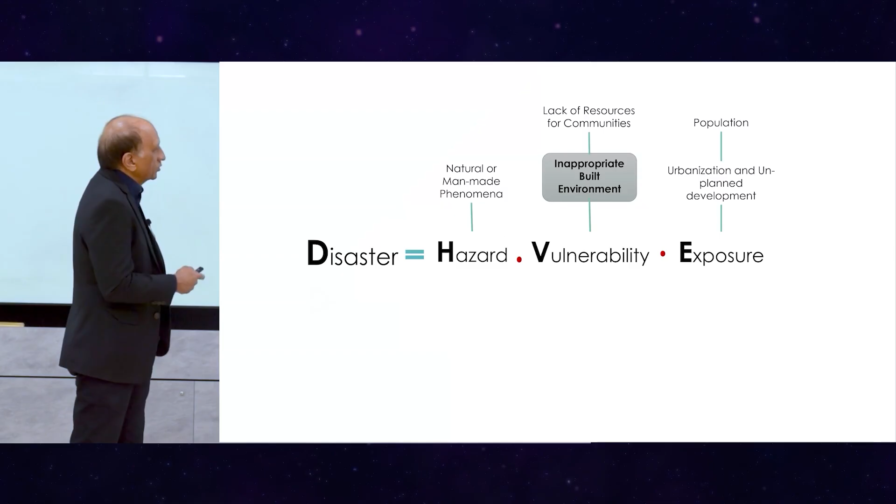So first of all, why is a safe structure essential? And that is because of disaster prevention. We all are familiar with all these disasters happening around us. Disaster has these components, as you know: hazard, vulnerability, and exposure. And as engineers, we may not have much control on the exposure, also may not on the hazard, but we have control over the built environment and its vulnerability.

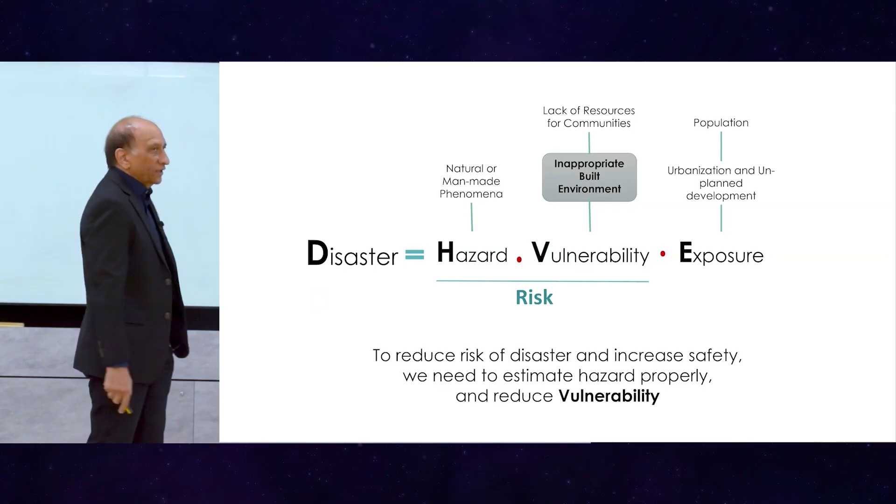And safety is part of that. So if you want to reduce the risk for the disaster, we need to reduce the vulnerability, because the hazard is not in our control that much. So vulnerability means that we need to make sure that our structure is safe, quote unquote.

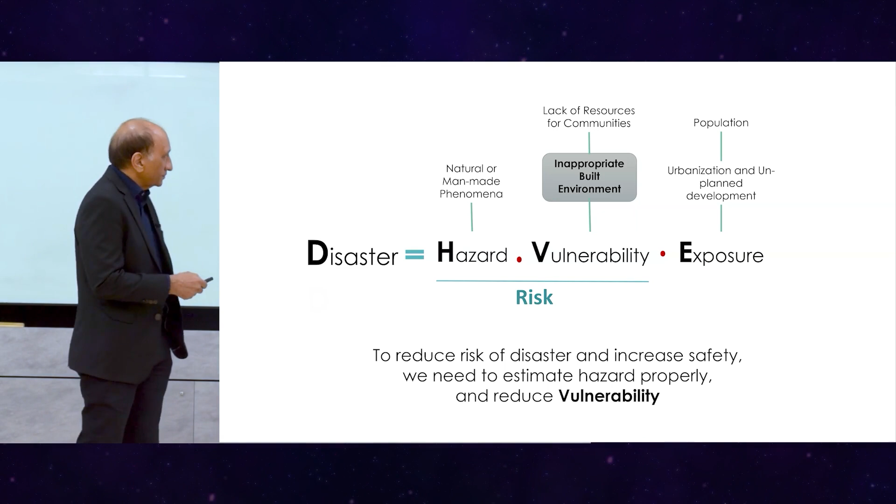Because we have so many hazards around us, from earth, from water, from air, from fire, and more man-made, it's hard to put them all together. In fact, multi-hazard assessment, vulnerability, and risk is a major area of research for many people.

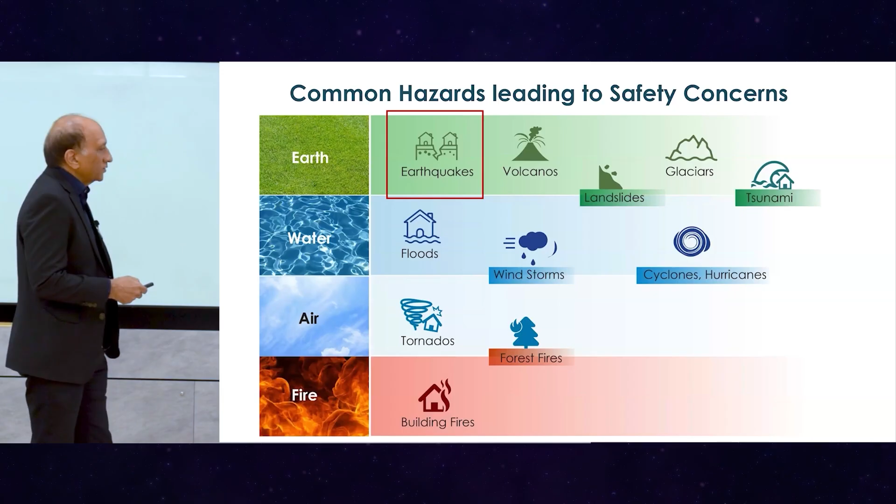But let's pick one of them for today, which is earthquake, and let's focus on how, as engineers, we handle earthquake or seismic design.

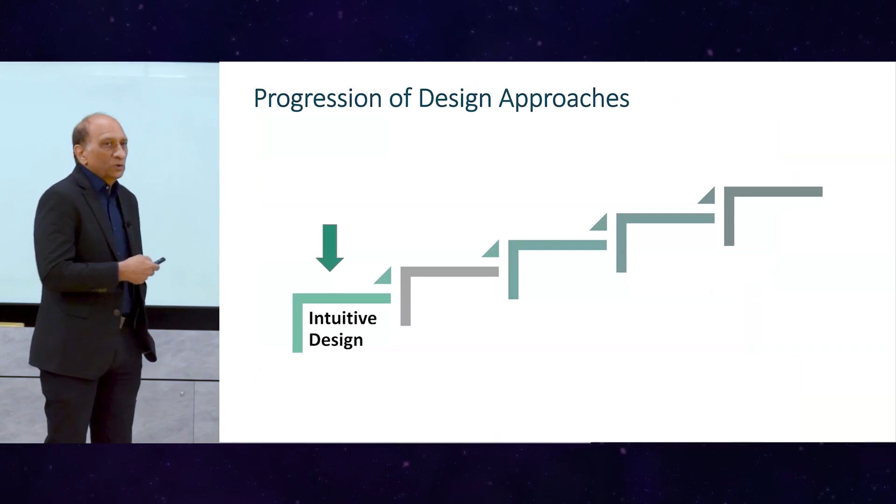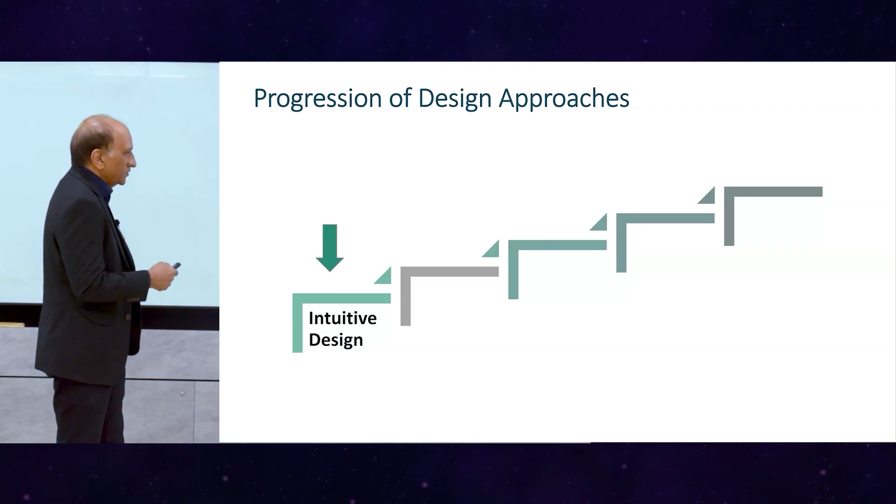In Hammurabi's time or before that, there weren't any building codes, no computers, no modeling, not even basic formulas, because those started in the 16th century. So people just used intuitive design or intuitive construction through practice and learning. Most things were just learned, passed from generation to generation, from one builder to his sons and his family. But then came code-based design, almost less than 200 years ago.

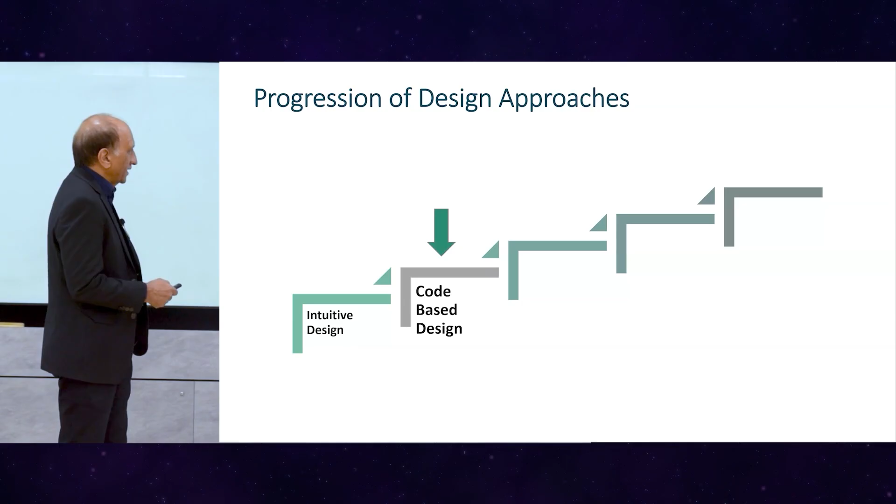And then we start to see formal definition of what engineers should do, procedures, and all of that. So let's look into that. How the building codes currently include safety is the first thing we should look at, and then see whether there's something we can learn from there.

The building industry these days relies heavily on building codes and standards, because they specify requirements, give acceptable solutions, and prescribe detailed procedures and rules for how to do things. Mostly they are based on research and experience, but not always rational, because some numbers are arbitrary or rounded, based on practical considerations.

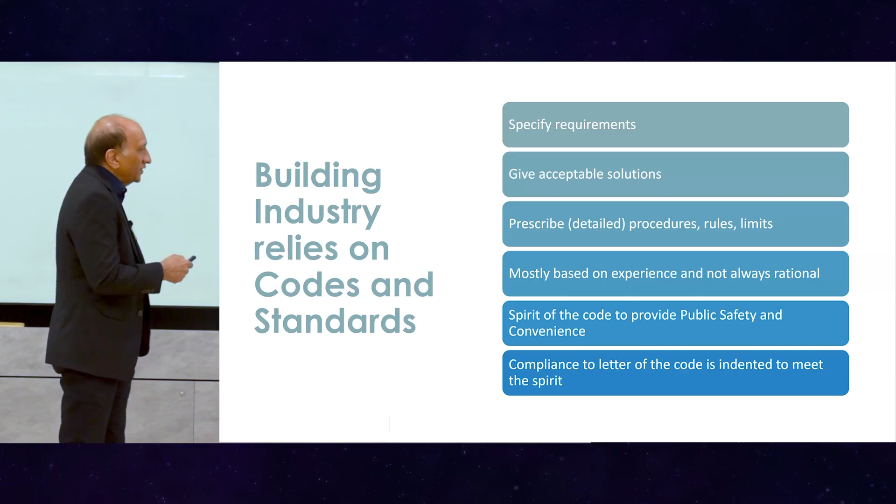The spirit of the code is great, because its spirit is to provide public safety and convenience. The idea is that if we follow the code to the letter, the spirit of the code will be met. But there is no way to cross-check that, no way to verify that this is actually happening. We have to trust that if we follow the code, we will get a good, safe structure.

Modern codes intend to ensure safety through estimated hazard or load levels. They will estimate how much live load there should be, estimate wind pressures, wind distribution, and earthquake levels—it used to be zones, but it's getting better now. They will also describe the structural systems and members, which structural system you can use for which height, and so on.

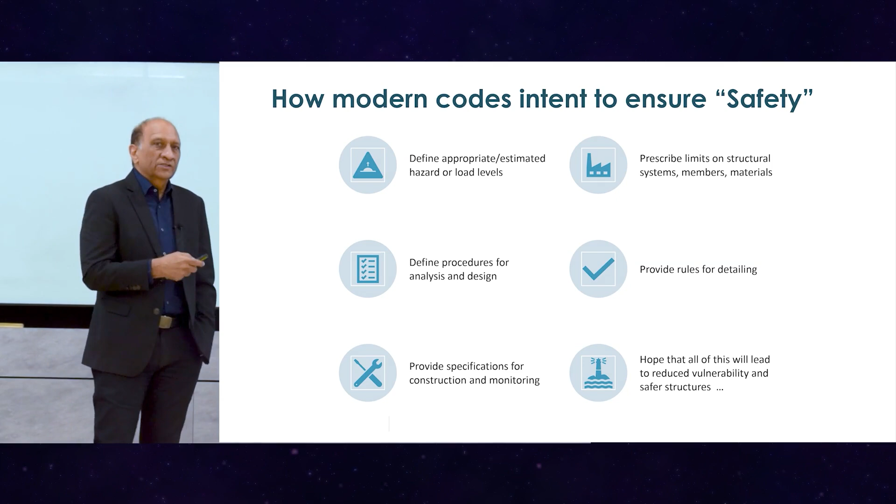They define procedures for analysis, which we will see today, and provide rules for detailing, which is very important. If you follow the rules and the detailing and everything, the hope is that it will lead to reduced vulnerability and structural safety. So that's the overall picture of the design codes and their philosophy.

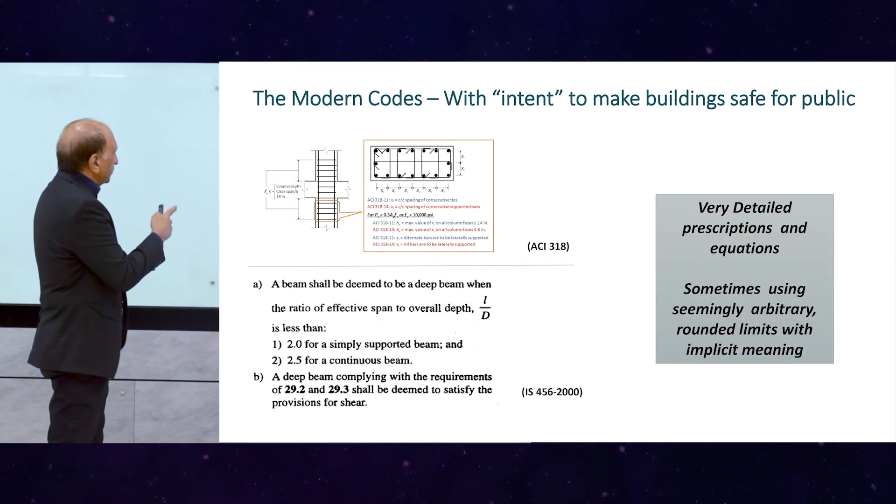Let's look at some of the requirements without going into details. As you can see, there are requirements with numbers—for this you do that, for that you do this, like the limit on the spacing of stirrups: 4 inches, 8 inches, rounded numbers, used in many places.

The intent, of course, is that we want to get a certain level of ductility and confinement. But the exact numbers aren't that critical, though most often they're taken to be literal. If somebody doesn't follow them, say providing a spacing of 5 inches instead of 4, or 150 instead of 140 or 120, then we say this is not conforming to the code, and we doubt the safety of the structure.

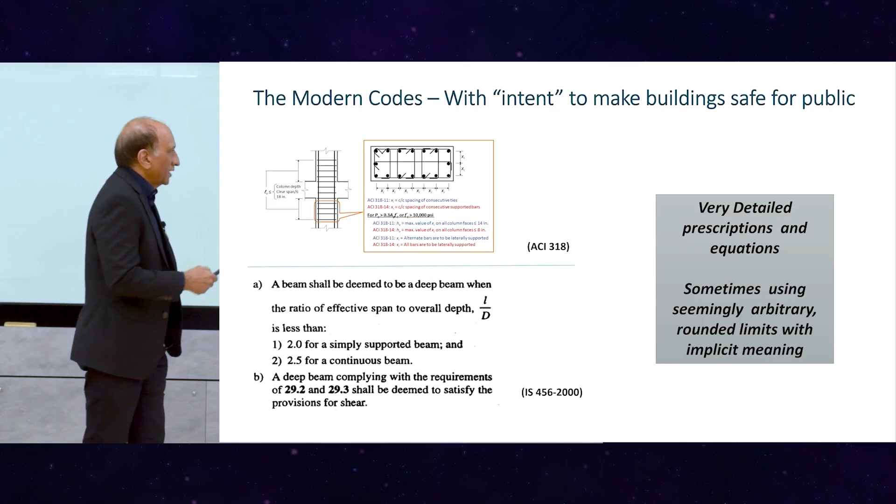That's what happens—most engineers, like myself at that time, were hiding or sheltering themselves from responsibility by saying 'I'm following the code.' A lot of the time we still do that, for legal battles or whatever. We say, as long as I'm concerned, I follow the code—you can check my calculation, and if that's okay, that's all I can do.

But that is not enough for the owners and the public. Owners will have many questions: Will the building collapse? Will it be damaged? Can I use the building after a given earthquake? How much will it cost to repair if it is damaged? How long will it take? Can I make a building that will not be damaged and will not collapse?

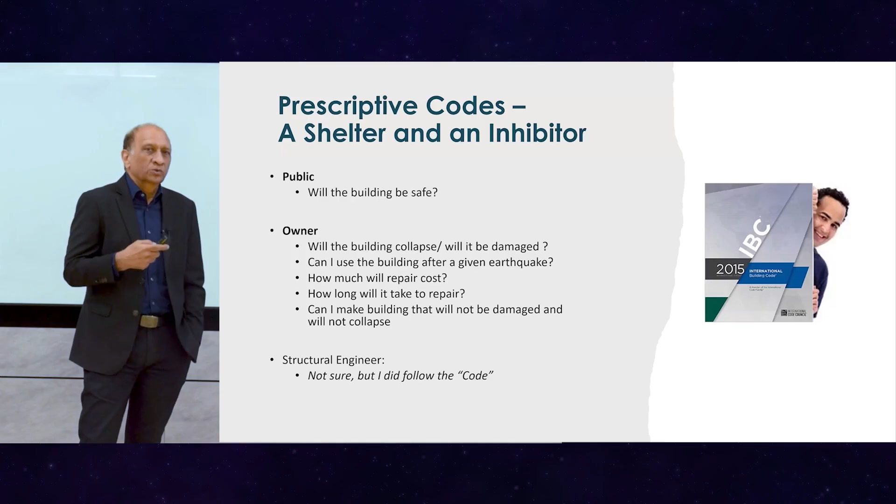And then the structural engineers normally say, yeah, I don't know about all of that. All I know is that I will follow the code strictly and I will over-design for you. But they don't have clear answers to most of these questions.

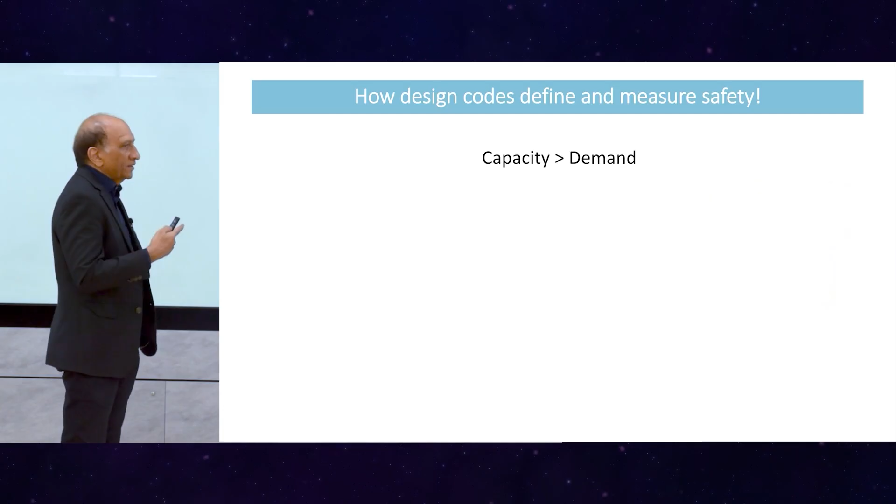Now, the one way that codes ensure safety is by looking at this basic concept of capacity being greater than demand, which is a beautiful concept, clear, until we see that this is not really the case as soon as it's applied, then factors start to come in.

We start to add the factor of safety. Sometimes people call it factor of ignorance, because we don't know anything or we don't want to know anything. And we say, okay, let me reduce the demand or increase the demand, reduce the capacity, and so on. And then we can come up with ratio of the demand over capacity.

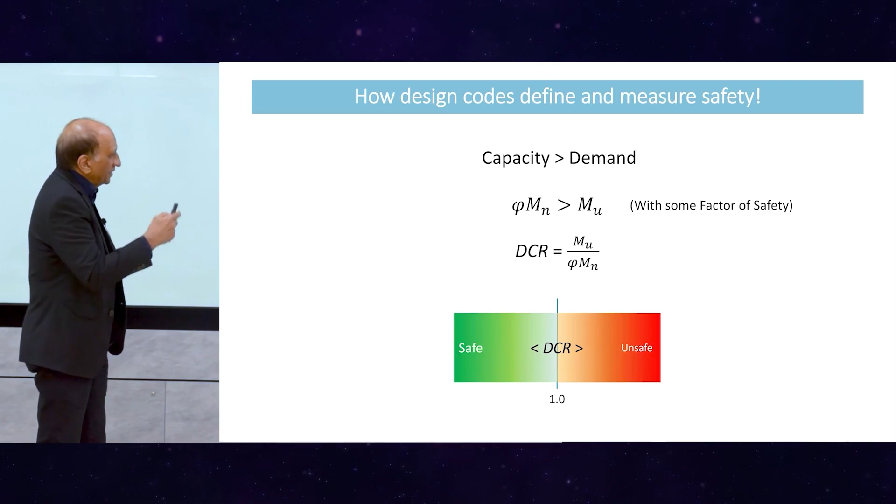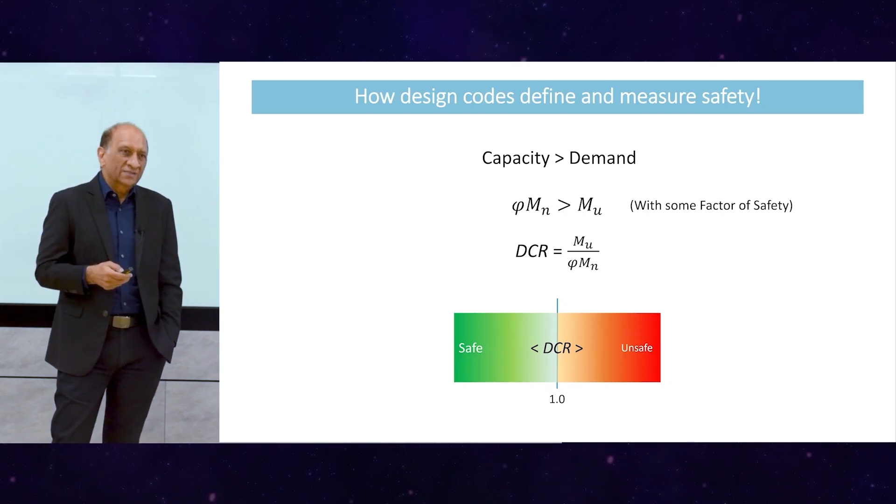And then we draw a line. One side is safe, the other side is unsafe. So as soon as the DCR ratio becomes 1.01, if our design is being evaluated by somebody else, they will say your design is failing, your design is bad, you did not do it well. If it is 0.99, it's fine. At 1.01, there is somehow a clear understanding that a little bit over the line, we are already into the unsafe zone. But let's explore that further.

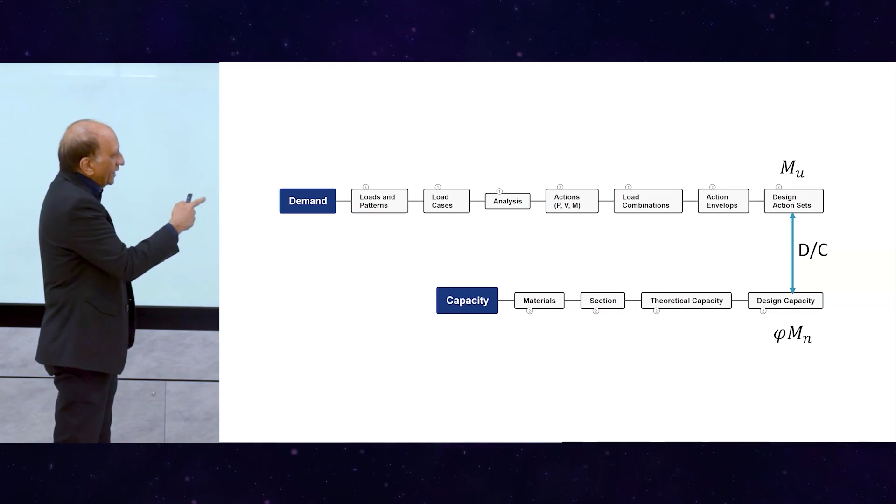If you look at the demand side, it is heavily modified through the process. The actual loads are very far from the demand that we compute for the DCR. We start with the real loads, we create load cases, we do the linear analysis, we have the actions, and so on. And on the capacity side also, we have materials, we have assumptions, we have section, we have theoretical capacity, we have capacity reduction, and then we come to the capacity.

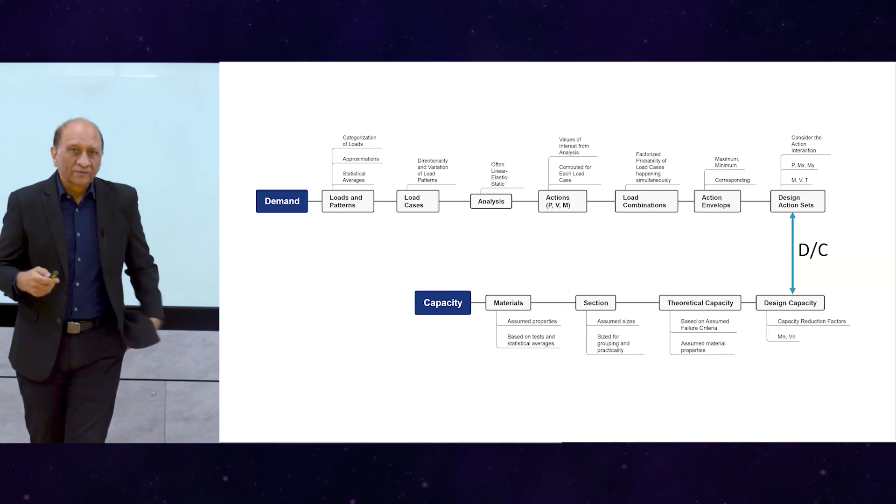So both sides are heavily factorized before they are compared. And even after that, we insist that they should be within, less than 1. So if I expand that, you can see that there is a lot of work done or a lot of assumptions being made at each step of the process until we come to the final DC ratio computation. So obviously that DC ratio, the intent is great, but the computation has already modified it drastically since it started.

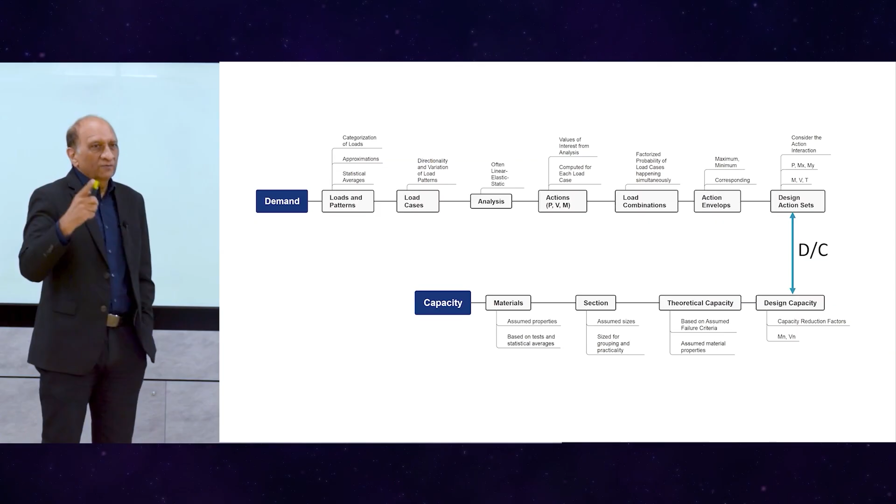So you can't say I'm comparing the safety of the structure for real load, because you can't really check that, since it's all been modified by load factors, capacity reduction factors, and so on. So this is one example, taken from the code itself.

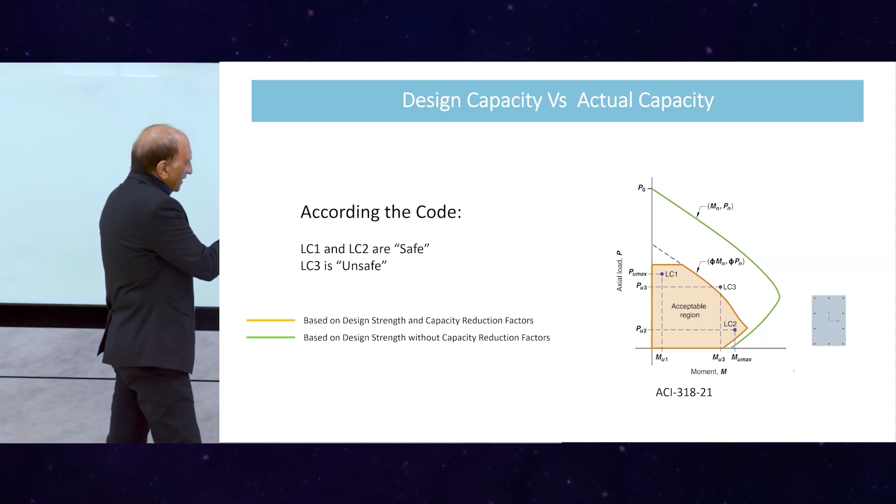It says that the green line is the computed capacity of a column section subjected to deformation in axial and flexural. The orange zone is the acceptable region. So according to the code, LC1, LC2 are safe, LC3 is unsafe, because it lies outside the line. But it is still well within the theoretical capacity of the section. So if it goes out, it doesn't mean the structure will start to fail or the member will start to fail, because it's still far from that.

And that green line itself is not the correct theoretical capacity, because it's based on assumed or design values of FC prime and Fy, both of which for the real case, tests and observation and data have shown that their expected values are always higher. So the real capacity will be somewhere out there. That is based on expected strength without capacity reduction factors.

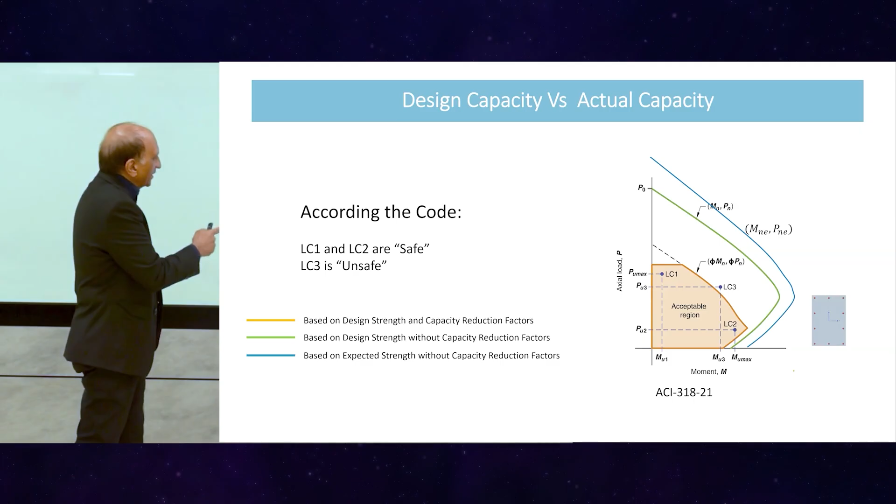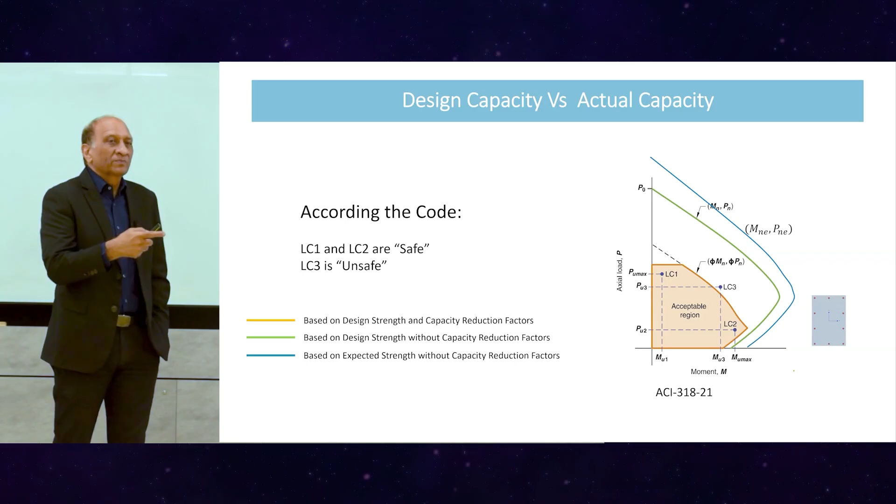So now we are comparing that blue line against that orange region, and we are defining our DCR ratio at that location, and we're saying LC3 is out. Actually, LC3 is well within the green and the blue. So the real problem will only come if this LC3 falls outside of the blue line. But obviously, that would require a DC ratio of 2 or 3 or something like that. So that's the first issue with the DCR computed on design like this one. But this is the probable capacity at site.

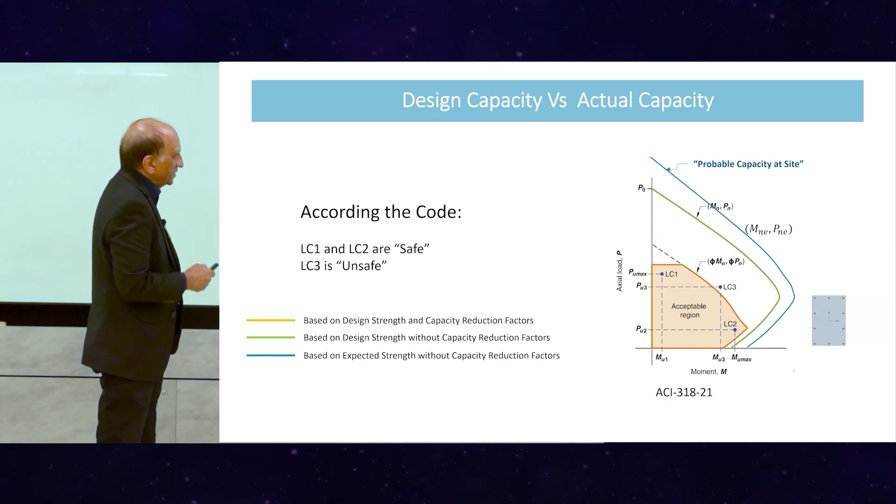And we are doing the elastic analysis, which is the linear analysis. So for wind load, it's quite straightforward. We are increasing the load to go to the design level, so we have a clear factor of safety present there.

But seismic is very different, because the actual expected earthquake, the maximum earthquake corresponding to the tectonics or whatever on the site, the maximum credible earthquake with a low probability of say 2%, is going to be very high on a site governed by seismic. Very, very high. And elastic design will just never reach that; we would have the structure undoable.

And then that is reduced to a design basis earthquake, by 2/3 of that, to come to a design level earthquake from that. And then it is still too far from the design level of the capacity that we have talked about for other loads like wind and dead and so on.

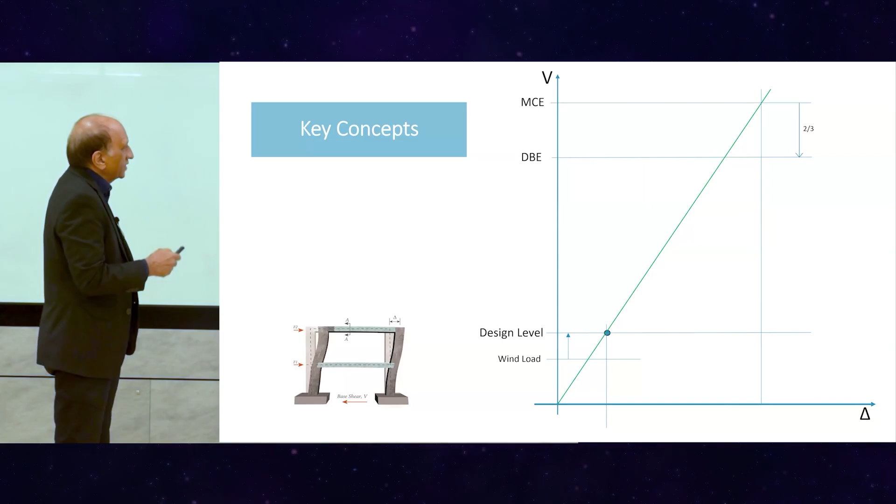So it is further reduced by a factor, the response reduction factor, called R here. Other codes have different names for that, but that's essentially it. We have brought down the earthquake real loading down to the design level.

Unlike the wind load, which was elevated, factored upwards for safety, we have to bring down the earthquake to a level, which means we are already talking about an unsafe scenario. So the actual is going to be higher than the design level in this particular case. So how do we manage that?

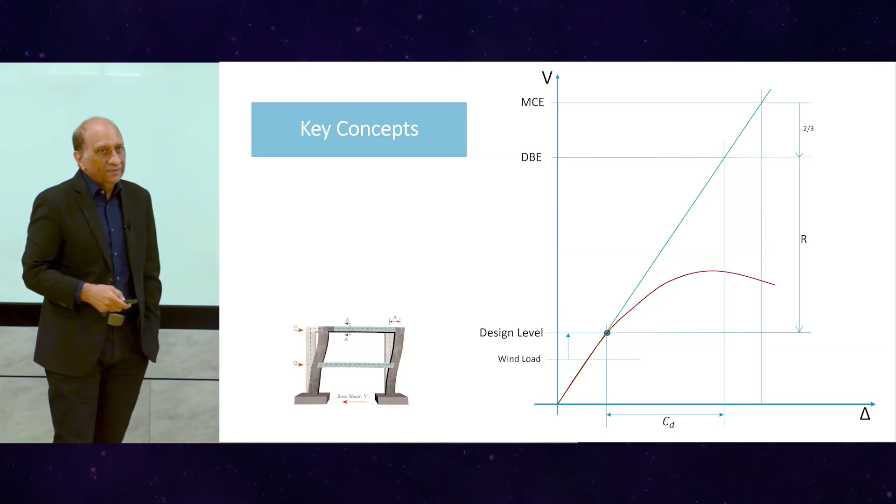We bring that down, and we're expecting this to happen because of the ductility, damage, and nonlinear response. We're expecting that the structure, after that point which is the limit, will continue to carry the load, but it will deform and it will damage, it will crack, the initial period will lengthen, damping will change, and all of that stuff.

And then we say, okay, that red line will be there somewhere. We don't know the red line, so we're trying to guess it now. We guess it by introducing a factor called omega, which is saying that, okay, the design level for one member is there, but for the whole structure...

...because not all members will yield and the expected strengths are higher, we have over-design because not every beam can be designed to the exact same value. We have to group them. Many beams will be over the design. So we put the omega overstrength factor, and then we estimate that point.

In fact, omega has three subcomponents, and sometimes we will discuss that. So this one is here. And then we have the net reduction of the demand, RD, from the design basis earthquake level down to the top of the actual structural response.

And the problem is that R can range from 1.5 to 8, or even some less than 1. So there's a huge range here. Omega in the code can range from 1.5 to 3 or 3.5. Which means that there's a big range.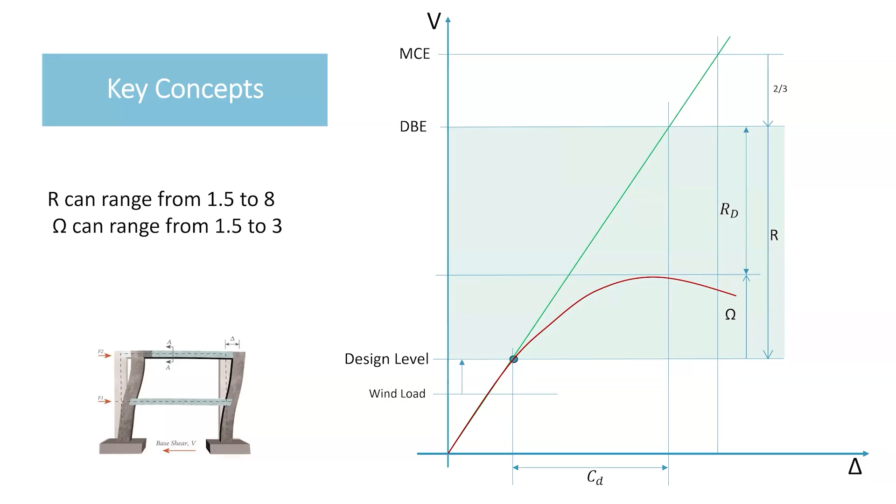And we are not considering the higher mode effects and things like that. Actually, we could spend the whole day discussing the factors here because there is so much to discuss. So if that is the problem, everything is highly approximated, and those factors, omega and R, are very specific to each structure. But the codes try to give us a table and try to put our structure there, though they don't really know our exact structure. Especially the nonlinear response is so unique.

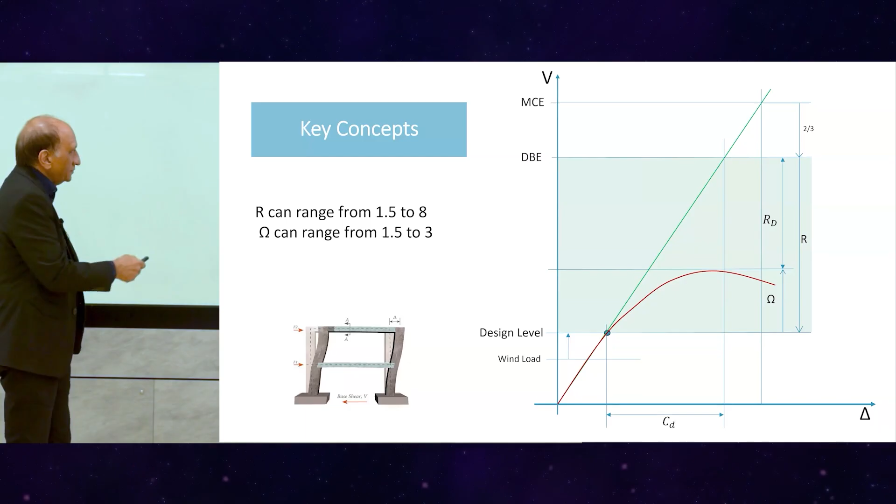So what if we were to remove everything and just got the nonlinear response directly, removing everything else from this slide?

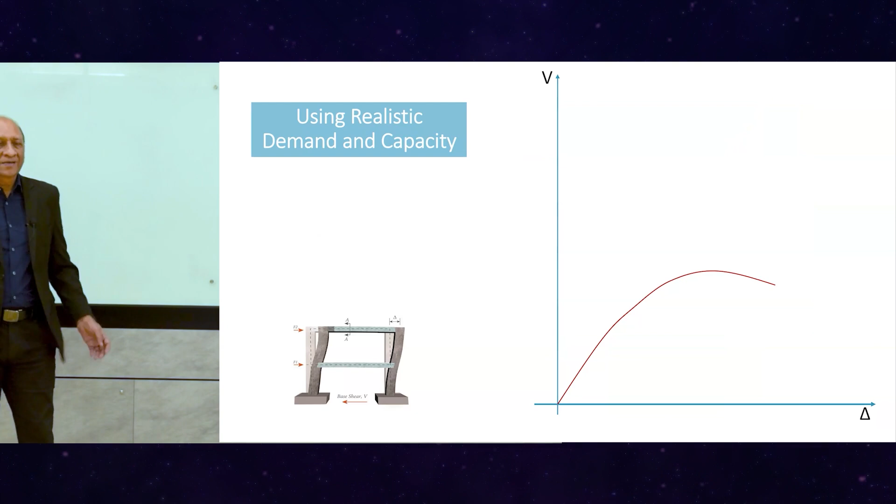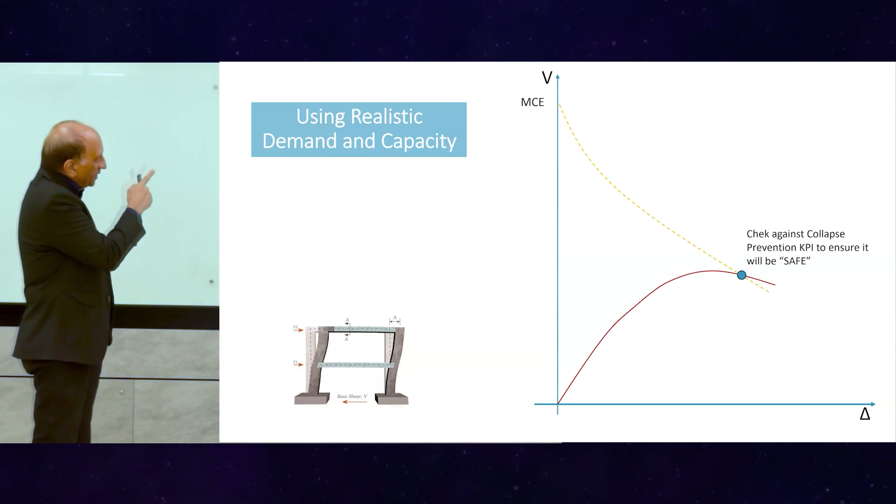And you say, okay, let's just go to the structure and find out what is the nonlinear capacity of the structure. And then at the same time, we determine the reduced demand at the same time, and say okay, from the DBE or MCE, I can come down and see where it hits my capacity curve or deformation curve.

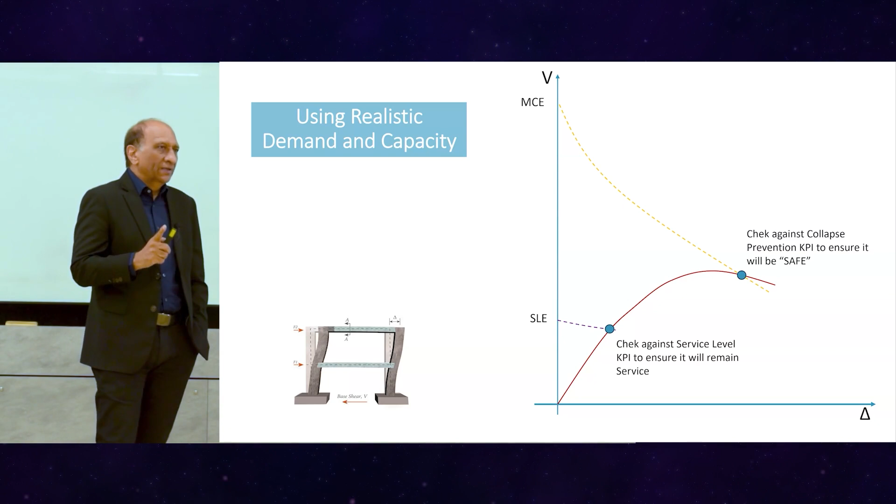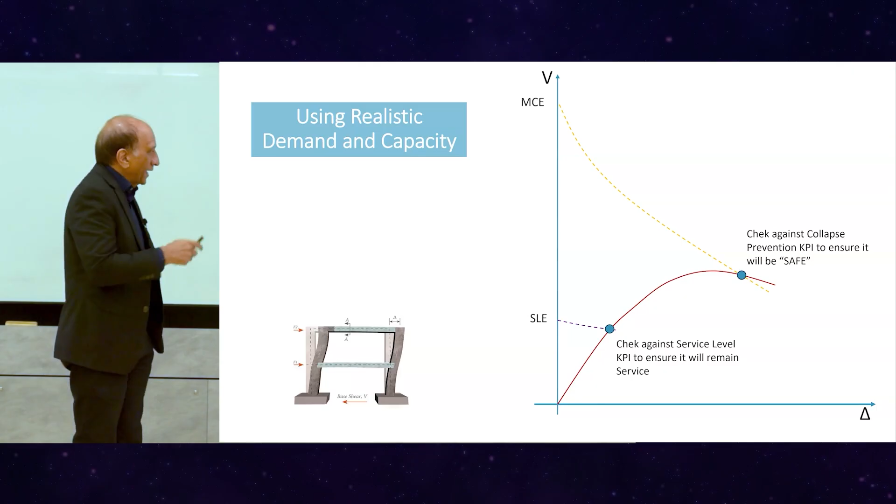And then we can do the same thing for another level, for the service level. So we can ensure from the MCE that the structure will not collapse for the most probable earthquake ever to hit. And we can also assure that the structure will not damage at the most common earthquake that can come several times. So with these two limits explicitly checked, we actually cover all of the safety and serviceability issues for earthquake.

And that is what leads to performance-based design's basic concept. So we move from intuitive design to code-based design, to the next step on the ladder, to performance-based design.

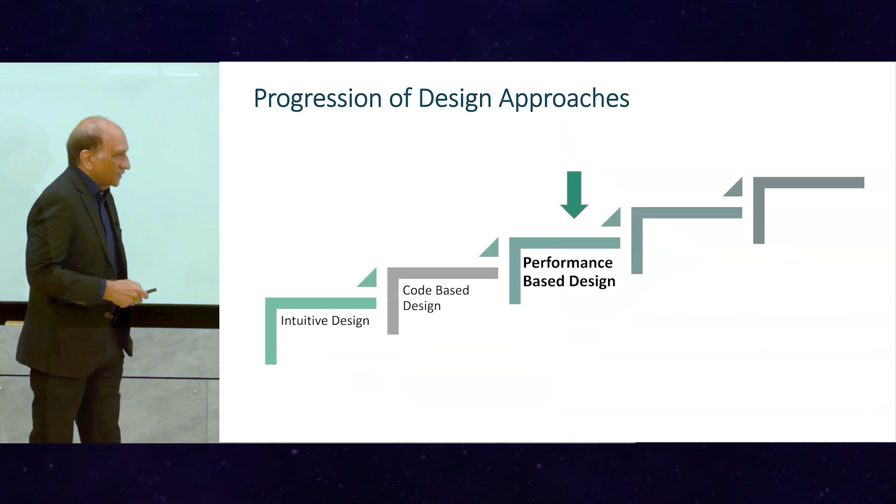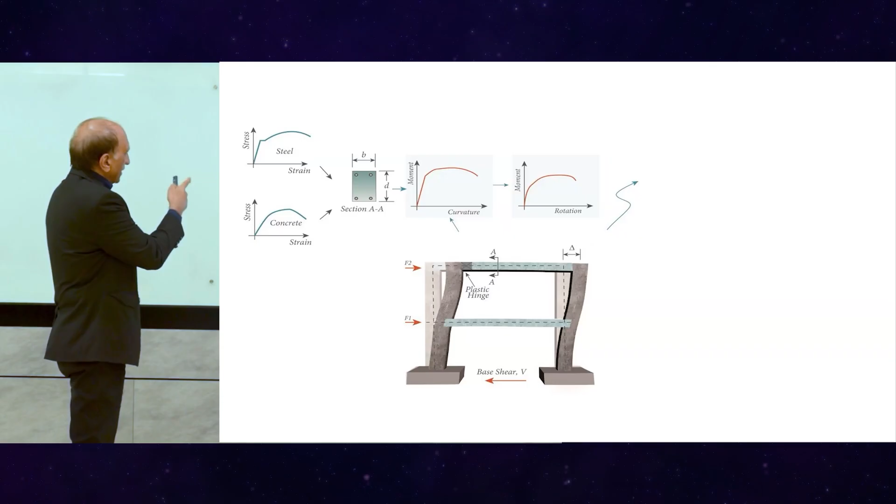So performance-based design basically means that you can take the real materials, the expected values of those materials, put them in the cross-section, where the reinforcement has already been computed from the design basis, from maybe wind and other loads. Then you calculate the nonlinear response of the section, like moment curvature, and put in the moment rotation hinges, different kinds - fiber hinge and so on. And we say, okay, now I have the structure which is almost going to be as built, as close to as-built as possible. And this incidentally gives us the opportunity to also evaluate existing structures.

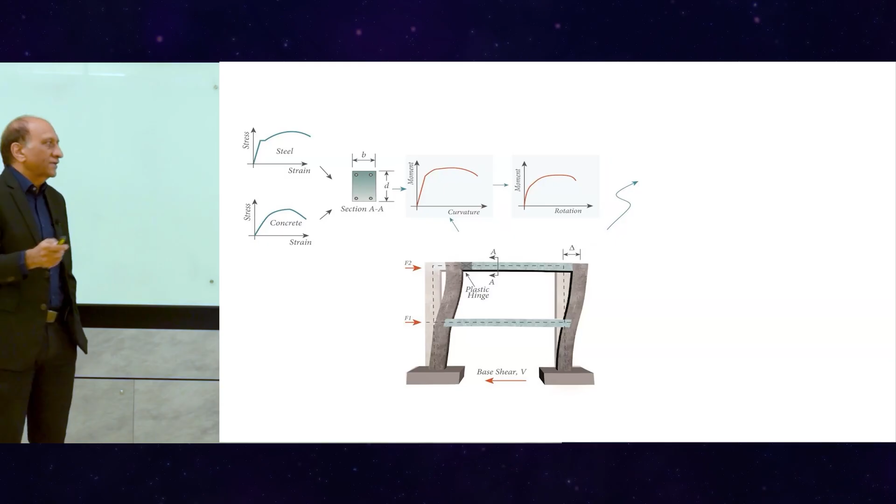So that way, we can now do both - we can do the design and we can also do the evaluation. And then we go to realistic, site-specific hazard. We look at the site hazard, and we get the real data about what is the expected level of earthquake.

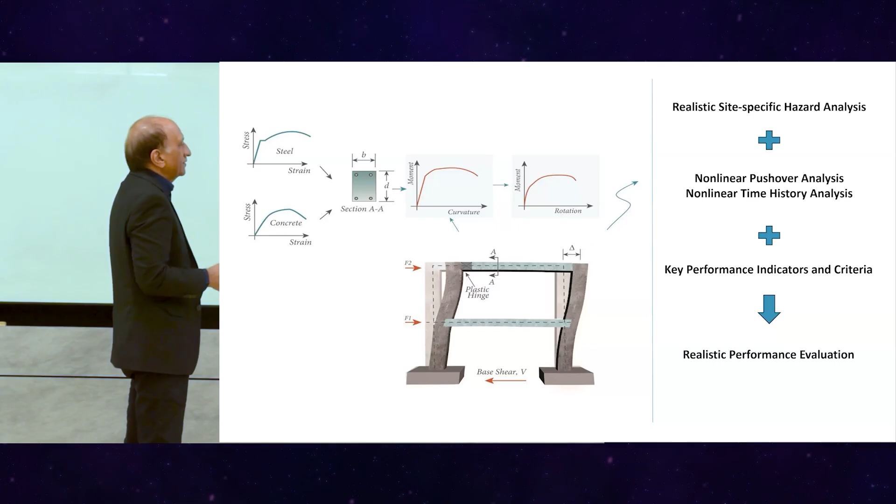We do the nonlinear pushover analysis. We do nonlinear time history analysis. Plus, we define some key indicators, and then we get a realistic performance evaluation. So that's how PBD or PBE would work.

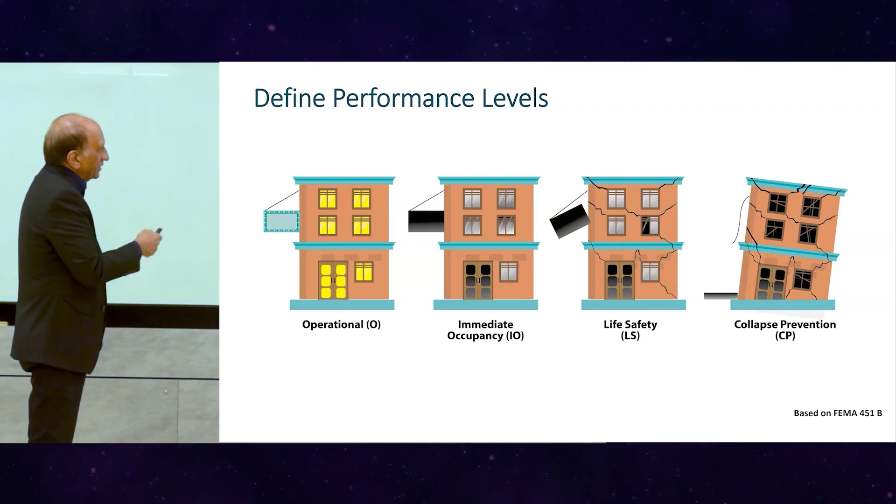So performance levels - now let's see how many performance levels you can have. FEMA, long time ago, defined that we have operational, immediate occupancy, life safety, and collapse prevention as the key performance levels. And then we can check them all. And then the damage and loss is also measured on that scale, and we can check them all back on the structural performance.

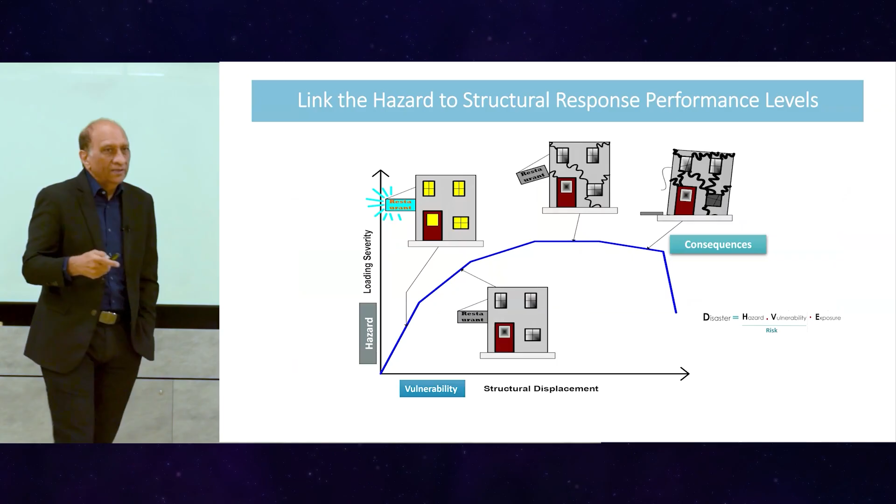So now we link hazard, vulnerability, and consequences, and we are close to solving that equation of disaster or disaster prevention. So that's the whole point - we are actually explicitly going back to disaster evaluation, prevention, and vulnerability, rather than only following the design through the code.

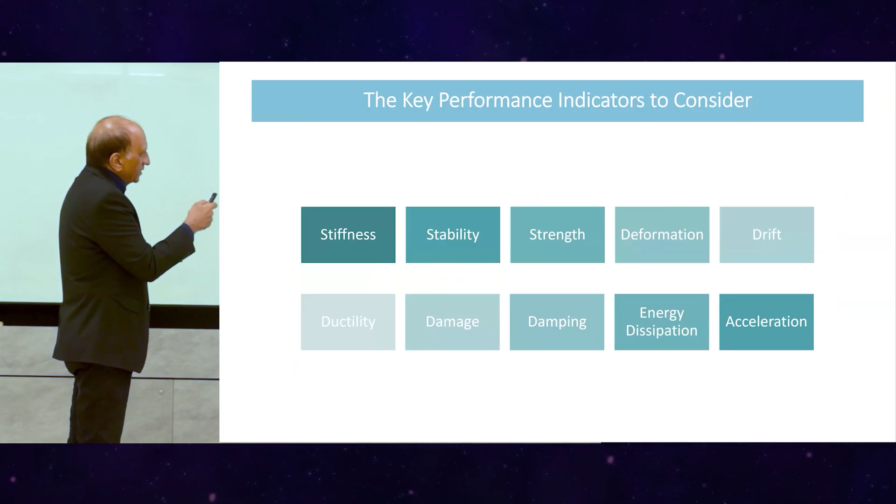Some of the key performance indicators you can check are stiffness, stability, strength, deformation, drift, ductility, damage, damping, energy, and acceleration. And these can all be checked from the analysis that we perform, especially if you are doing nonlinear analysis. That means we have explicit limits, and clients or bodies can change those limits depending upon the type of structure, importance of structure, and so on.

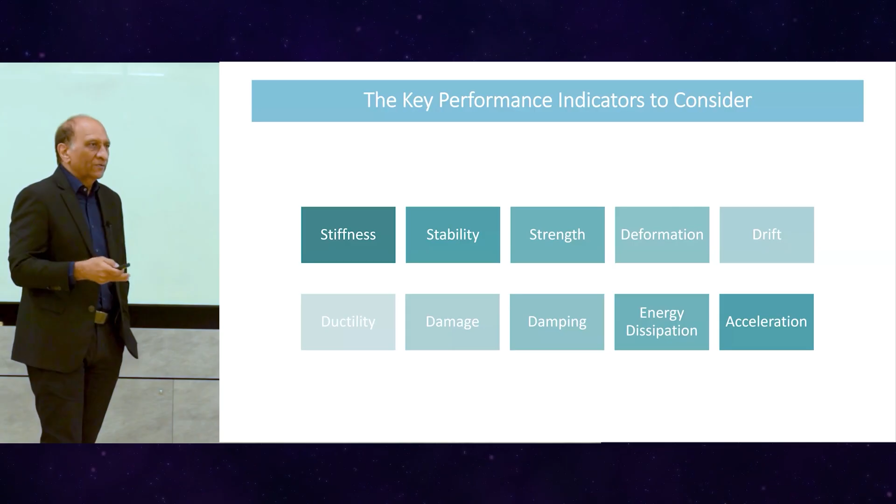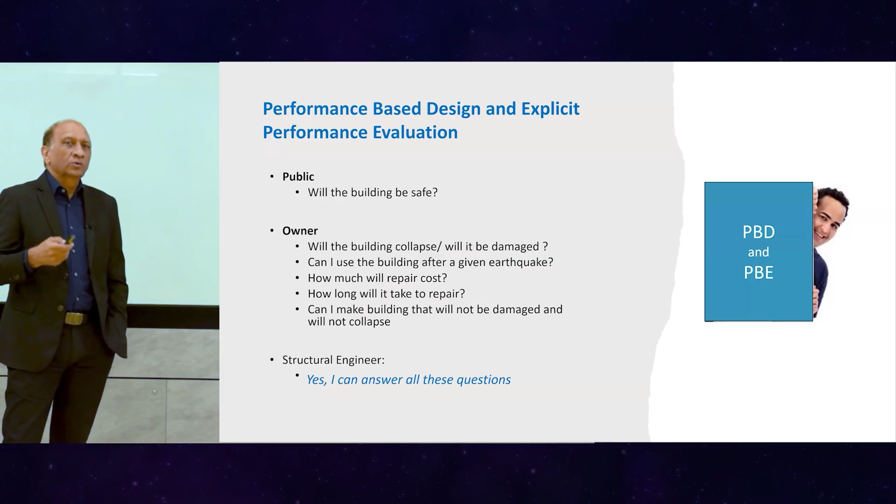So now, go back to this picture again, where we said that we are hiding behind the code. If we change the code to PBD and PBE, then the whole slide will change - performance-based design and performance evaluation - and the engineer can say, yes, I can answer all these questions. So now we have full explicit knowledge and the tools to answer all the questions of the public that we were unable to answer explicitly when we followed the code. That's the main driving force why PBD and similar techniques are important.

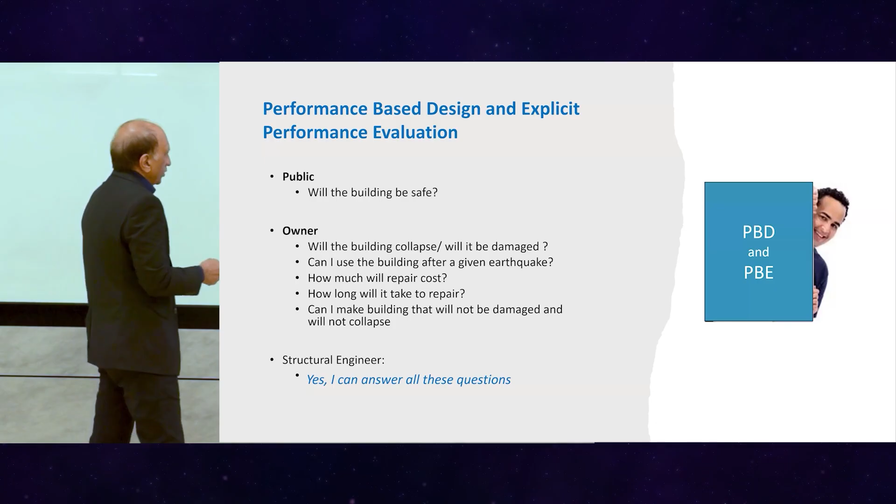Now, the problem is how to convince other people. Okay, we are convinced, maybe you are convinced or not, I don't know, let's see. But the issue is not us - it's about the stakeholders who are involved in the project.

And those stakeholders, we have to start with the client, because the client is going to decide, okay, I want my project to be done on PBD. And we had very good fortune on this one, because we started this in Philippines some 15 years ago. We were very fortunate that one of the clients in Philippines agreed to say, okay, I'm going to try this PBD with you.

And then watching him, other clients also joined. Since then, our AIT Solutions and our team, AIT, has been involved in more than 200 tall buildings, performance-based evaluation and design. It was just convincing one, and then other people just started following.

So once you do that, you have to work with the architect. Structural engineer on record has to work with a PBD specialist who is specialist in doing this. Then we need to work with a site-specific consultant who does the PSHA for the site. And we definitely need a PBD reviewer, because this is very involved analysis. Somebody third party, with better knowledge than the PBD consultant, should review this. Once all that picture is complete, then we have a good PBD project completed, something that everyone can trust.

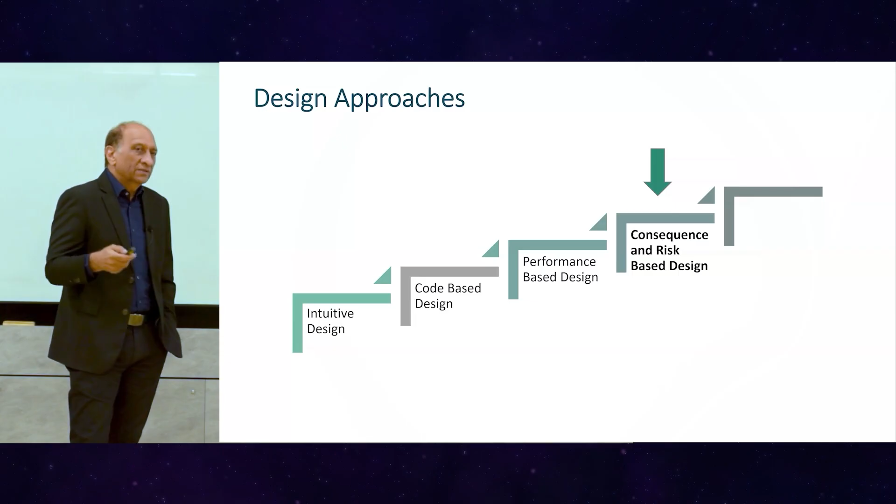So let's quickly go through what else is lying ahead of us. Actually, it's not future; it is already present in many places. So from performance-based design, there's a consequence and risk-based design. Mostly the insurance industry is interested in this one. They would like to reduce the insurance cost if you know that the building has better risk prevention. And from that, we have resilience-based design, which is much broader. A lot of work has been done and is being done on that, including non-structural damage, among many other things. It's something we are on the way to.

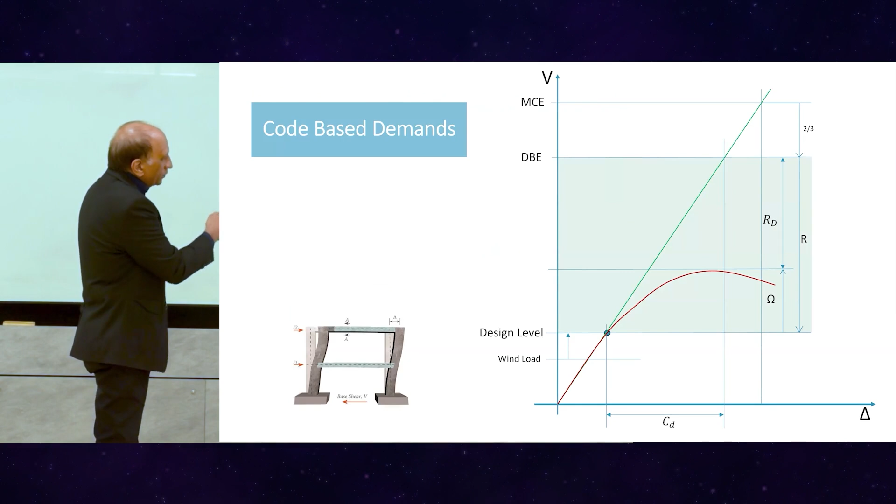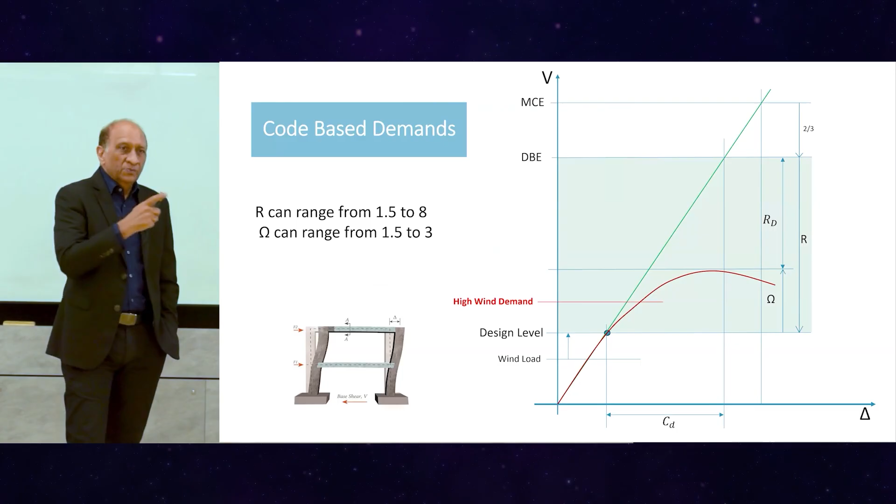So coming back to this diagram one more time, we assume that the wind load was below the seismic design level load. But what if we have a wind load which is much higher than this demand? This opens up a whole new difficulty in this PBD, because the factors R and omega, as computed, are not going to be valid, because you cannot have the seismic design level below the wind demand level.

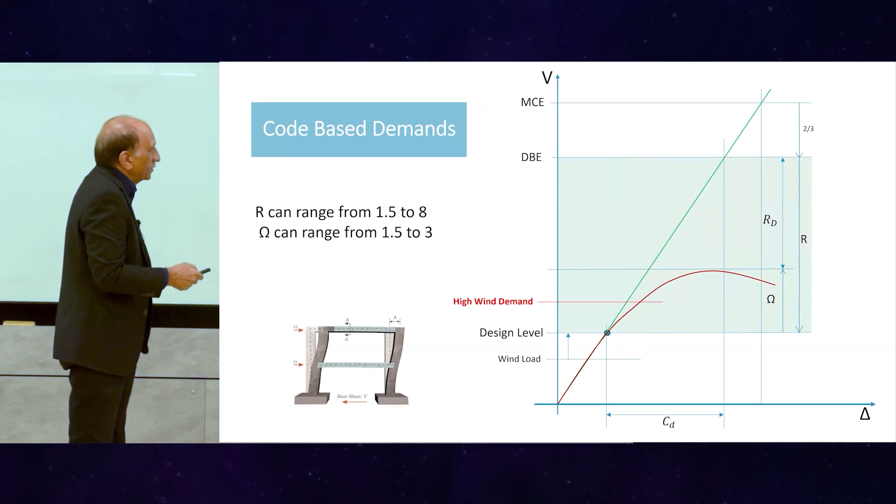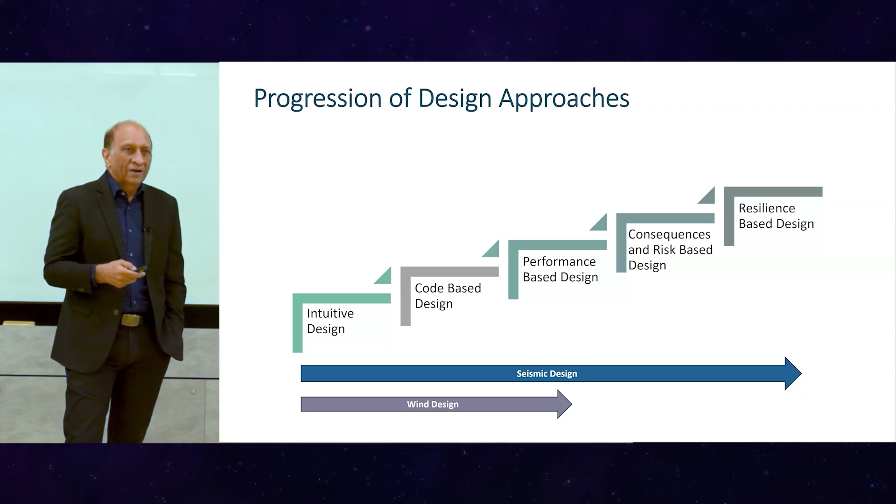So it is leading now to the adoption of seismic design going to resilience-based design, and wind is also following, so people are saying, if you're doing the seismic design PBD, why shouldn't we do the same for high wind, like return period of 2,000 or 1,700 years or more. So making them similar, new guidelines are coming up. People are now saying wind design is what we can do also using PBD.

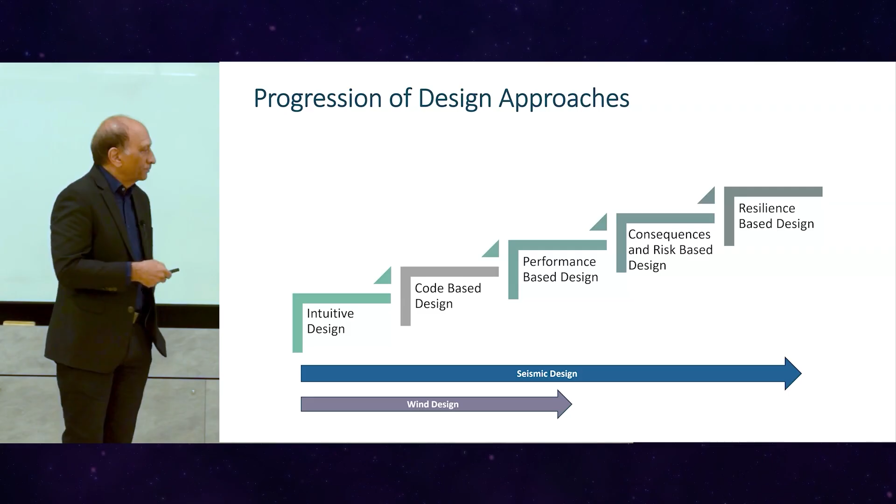And finally, let me conclude by saying that the structural engineer should be answering bigger questions. First, what is the purpose of structural design? We should not just say I'm going to put the reinforcement. What is the ultimate big purpose? That is, as I mentioned, resilience, sustainability, and all. That's the ultimate goal—to increase resilience, reduce vulnerability, and also increase sustainability.

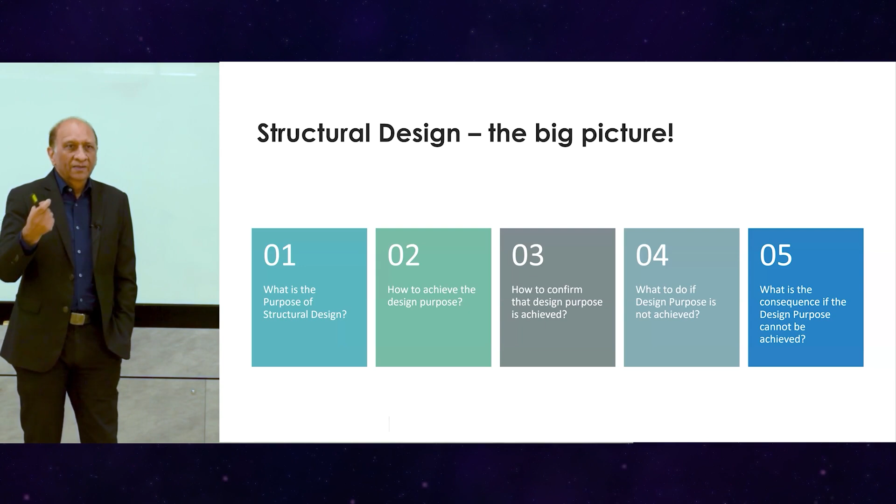Because when you are using smaller sizes, you use less material, your carbon footprint goes down, and you have better environmental sustainability. How to achieve this design purpose? Once you have the design purpose, we should have a clear idea how we are going to do that. And then, more important, number three, how to confirm that the design purpose has actually been achieved.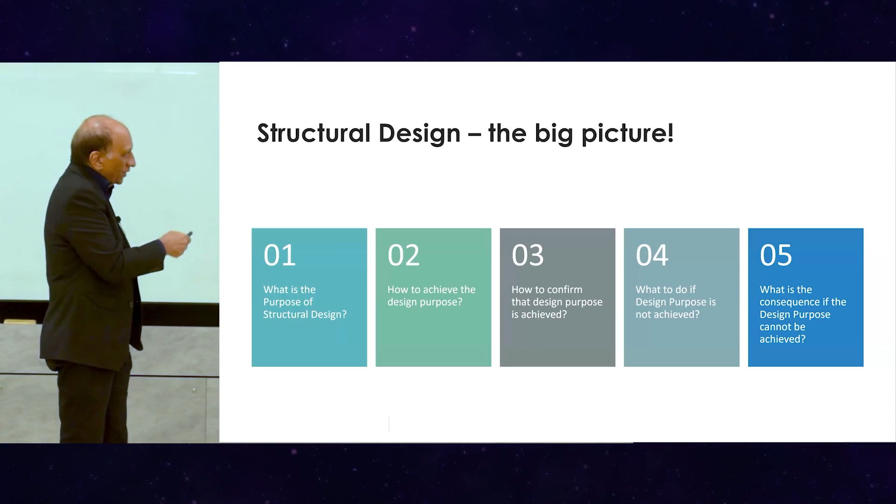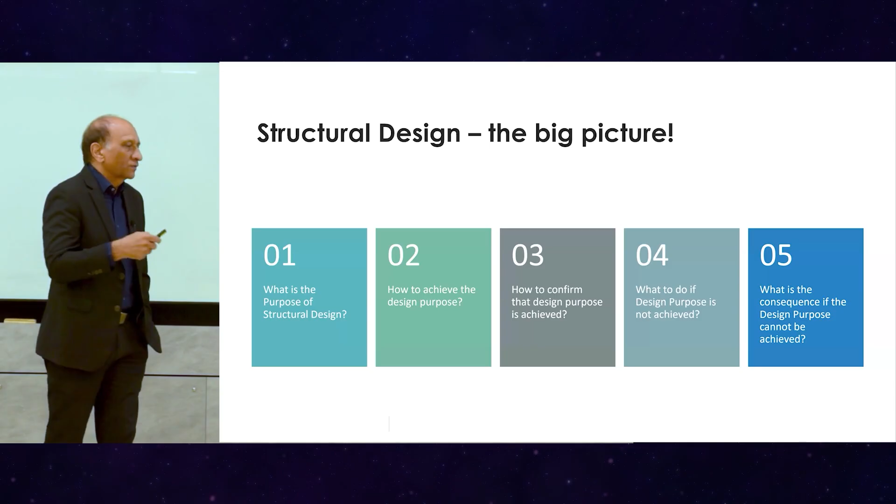It's easy to say I'm going to do this one unless it is checked and confirmed. So that is what we talked about—PBD and PBE actually help to do that. And then, what to do if the design purpose is not achieved, how to go back and fix it. And finally, what are the consequences if the design purpose cannot be achieved for whatever reason, cost or otherwise? We should be able to tell that this cannot be done, and this is the solution to that.